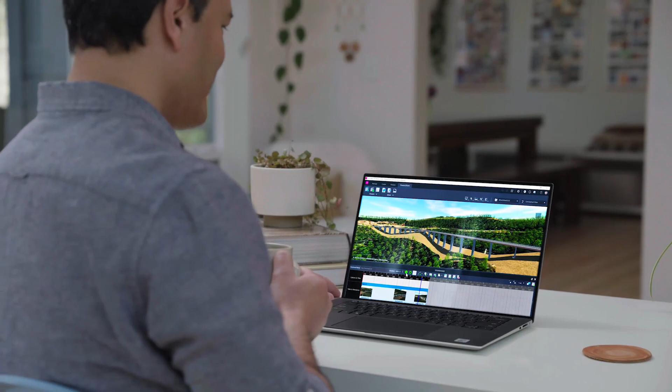InfraWorks 2024 adds powerful capabilities for civil structures designers, driving operational efficiency through reduction in design time and enhanced data exchange.

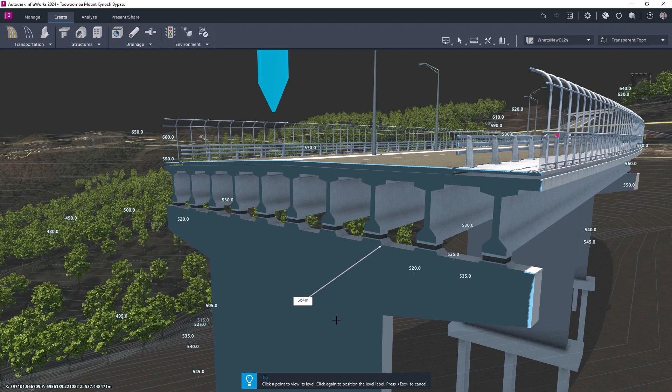Critical geometry can now be identified quickly with the enhanced point level tool. Spot levels can be taken anywhere on the structure with the tool snapping to critical points in both 2D and 3D planes.

When importing custom components, both optional and expected parameters are now listed in the dialog, reducing the chance of design errors.

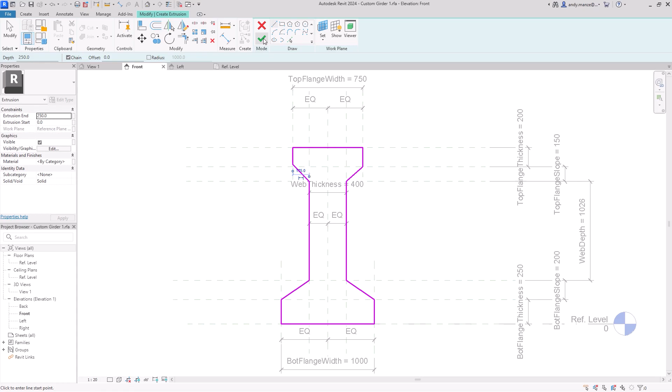The use of consistent and familiar toolsets can often aid efficiency in the creation of design components. The support for Revit families has now been extended to include 2D geometry in addition to 3D components.

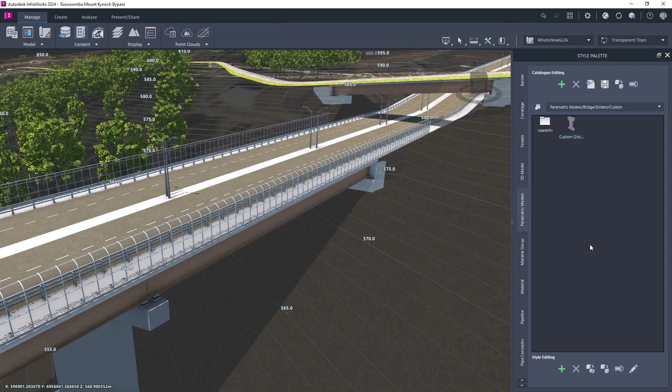Once the 2D outline has been developed in Revit, it can be added to the InfraWorks library of components, providing a consistent method for adding decks, girders, and tunnel sections.

Once the library has been extended with the new components, they can be selected and added to the structure. These new components can then be copied and manipulated in the normal way.

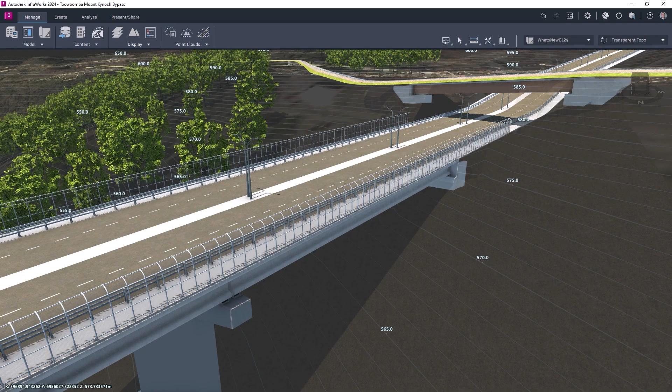When importing custom parts with subcomponents, each subcomponent can now be configured with its own Revit category, and individual categories can now be applied to generic models to satisfy Revit category design requirements.

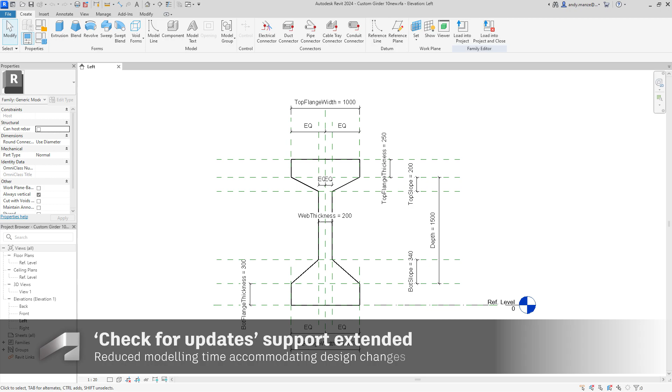In order to accommodate design changes more efficiently, the Check for Updates feature has been extended to cross-frames and 2D slice-based geometry, where 2D slice data is respected during the update process.

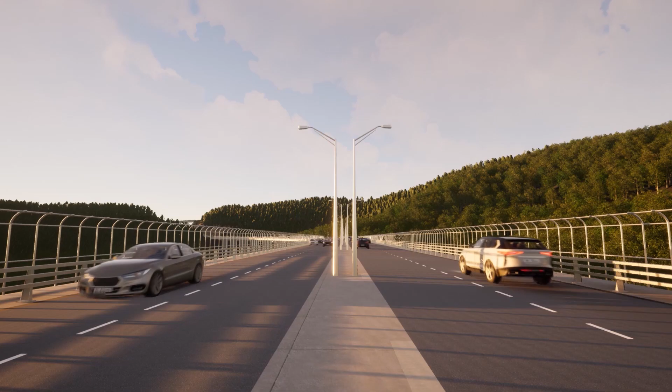These new features complement an already comprehensive advanced toolset for bridge designers, ensuring design requirements can be efficiently met. These capabilities now cover structural analysis, component design, modelling, and visualization of bridge structures.